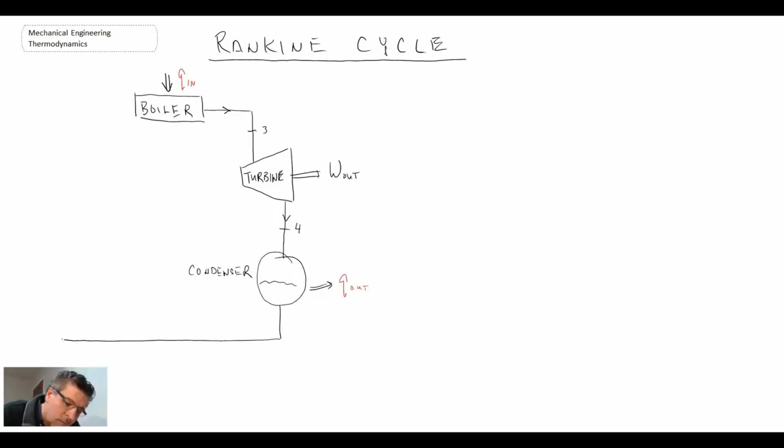So what we have with the Rankine cycle, you can see the schematic on the left, and we have a pump. The fluid comes out of the pump, goes into a boiler where we have heat addition. It converts into steam. The steam then goes into a turbine, produces work. The steam comes out of the turbine, and we condense it back into a liquid phase and then bring it back into the pump.

So what we're going to do now is let's represent that in the process diagram in the TS. So we always start off on the saturated liquid line, and that will be state 1, which is where we then go into the pump. And when we go through the pump, what we're doing is we're raising the pressure of the fluid, taking us to state 2. And then we have a constant pressure line, because we will assume that the operation in the boiler is a constant pressure. We'll see later that that's a bit of an approximation, but it's one that we'll use for now.

And then once we go through the pump, so we're doing work in here, so we'll represent that. We then go into the boiler, taking us from state 2 up to state 3, which brings us into the superheated region. And in order to do that, we need to have heat addition. So that is what is going on in the boiler.

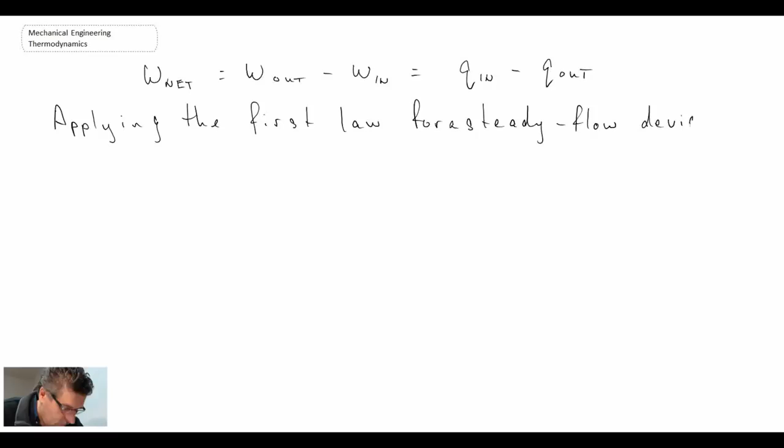So writing out the first law for a steady flow device, we have the following for our heat transfer. Now, we're usually dealing with a device that's stuck to the ground. It's not moving, and consequently, we will take kinetic and potential energy and neglect those.

So the first component that we will look at will be the pump. And in the pump, if you look back to the process diagram and the schematic on the previous slide, we're going from state 1 up to state 2. And so let's take a look at that. Now in the pump we can assume that there is no heat transfer, so Q will be 0. And with that, when we come back to our first law, what we will have is the following for the pump.

It's basically just the change in enthalpy. So we need a way to be able to express the change in enthalpy in the pump from the exit to the inlet. And in order to get that expression, we'll be using the steady flow work equation that we saw in an earlier lecture. And if you recall, this is the one that had the specific volume multiplied by the change in pressure of the fluid as it went through the device.

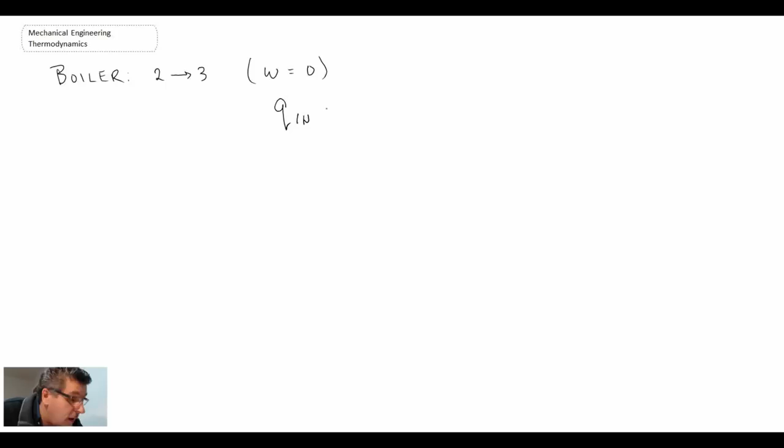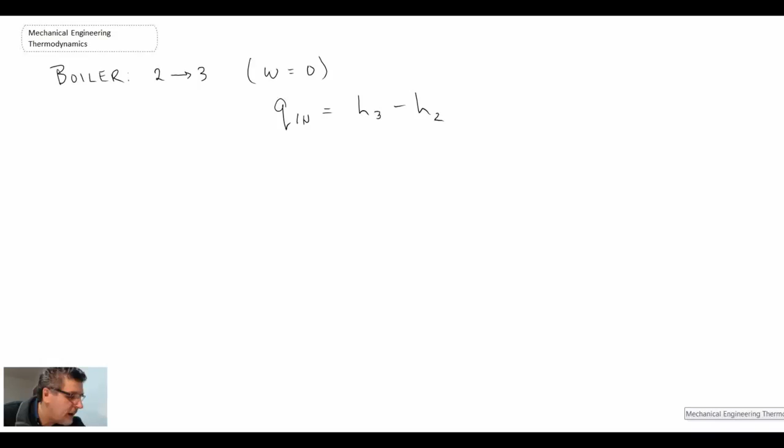And then the steady flow version of the first law turns out to be the following. And so it's pretty simple. It's just the change in enthalpy that we have going across the boiler between state 3 and state 2. Now the next item that we will look at is the turbine.

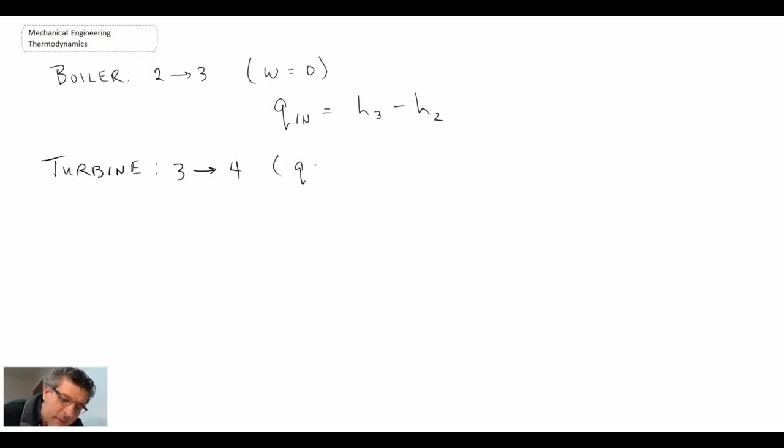Now in the turbine, we're going from state 3 to state 4, and in the turbine, just like in the pump, we're going to assume that there is no heat transfer, and the only thing going on in the turbine is we're getting work out. And the way that we will quantify that is going to be the change in enthalpy of the fluid going through the turbine. So looking back at our TS diagram, it will be H3 minus H4. So that difference is how we can then determine the work in the turbine.

And that'll be pretty easy because we can get those enthalpy values out of the superheated steam tables, assuming we end right on the saturated vapor line. If we go into the two-phase region, then you have to look at the two-phase characteristics there to get the enthalpy at state 4. The final thing that we have is the condenser.

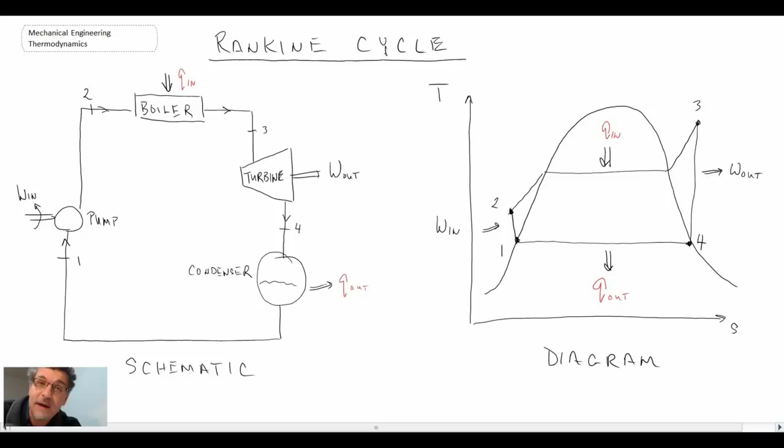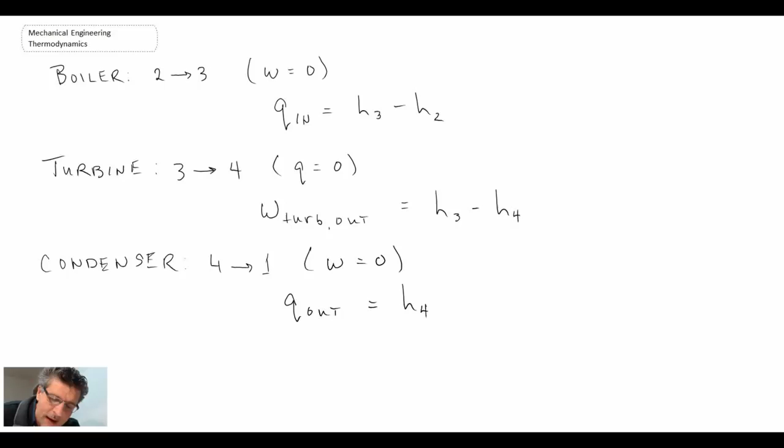And for that, we're going from state 4 to state 1, going back here. So this is the operation of the condenser. It's basically heat rejection. We're going through a phase change. In an ideal world, we go from saturated vapor down to saturated liquid. And consequently, there's no work in the condenser. However, there is heat transfer. The heat transfer is leaving the system, and that would be the enthalpy at 4 minus the enthalpy at 1.

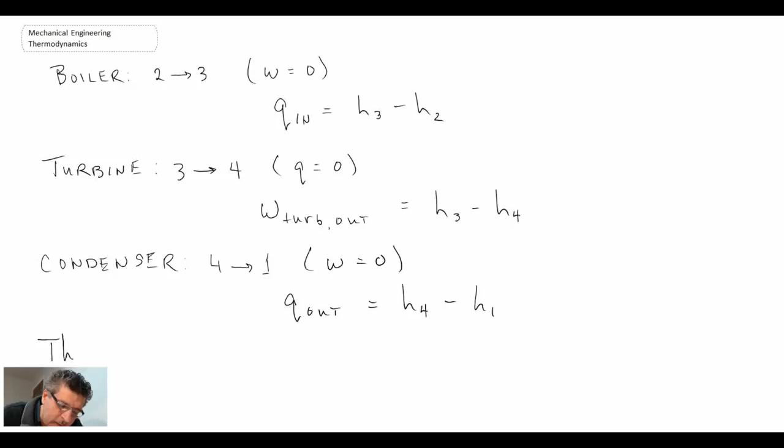So those are all the different equations we can use to examine each of the individual components or devices within the Rankine cycle. And with that, the final thing that I want to say is that the thermal efficiency can be calculated with the following.

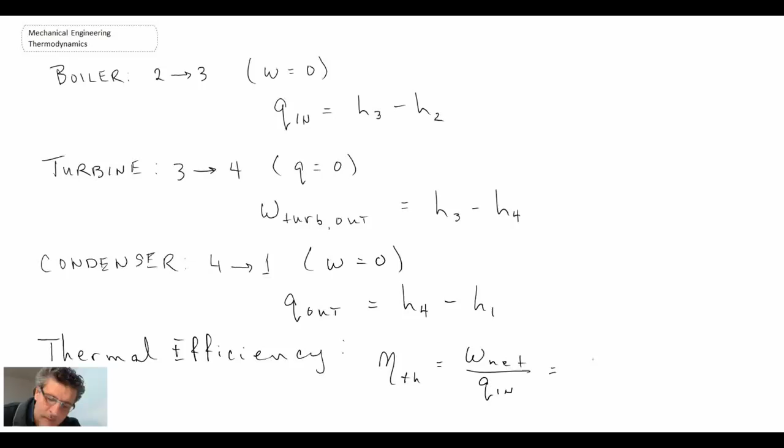So if you're given a Rankine cycle, you can go through, determine all of the different enthalpies, plug them into these equations. You can get work net, so you'd have to evaluate both of the work terms, the turbine out and the pump in, the heat in, or if you know Q out and Q in, you can also determine the thermal efficiency for that, and that is the equation that we can use to determine thermal efficiency of the Rankine.

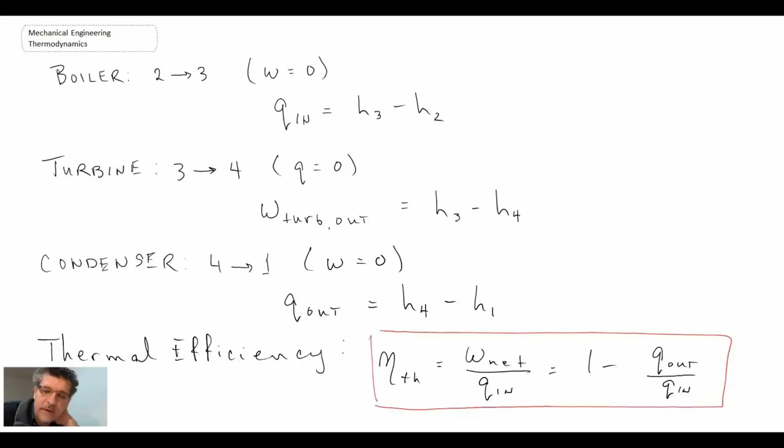So what we're going to do now is we're going to go into a little more detail looking at each of the individual components and how they operate. So we'll spend a little bit of time looking at the performance of each of the components within the Rankine cycle.